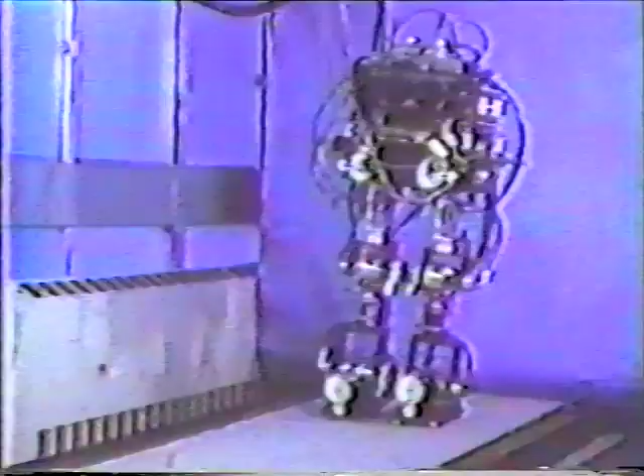Most efforts in the area of legged locomotion have been aimed at complex active mechanical systems using as many as 7 degrees of freedom and requiring very large control systems. Consequently, the motions of these machines have been quite awkward and clumsy, and certainly do not mimic human walking.

Human walking is essentially passive, requiring very little muscle interaction to achieve the motion of the walking. A robot based on this concept would require far less control and power, and would be inherently simpler and more efficient.

Passive dynamic walking is simple. It is a simple interaction between gravity and inertia that sustains a steady walking cycle on a downhill slope. No motors or actuation are necessary to achieve this motion. Take, for example, a slinky. As you give it a push down the stairs, the slinky coils and uncoils, and the interaction between the spring and gravity allows it to walk down the stairs.

Tad McGeer at Simon Fraser University used a similar concept to build some walkers that use passive dynamic motion in order to walk in a similar way. Part of our efforts in this project have been to recreate some of Tad McGeer's work in building mechanisms such as this one, and then to pursue some design ideas of our own, like this.

This video will show clips of these two walkers and some others walking on downhill slopes, shallow ones, about 1 to 5% grade. And then it will show some information on the details of our progression of ideas, as well as some information on some construction techniques and some additional important things that we learned creating these walkers.

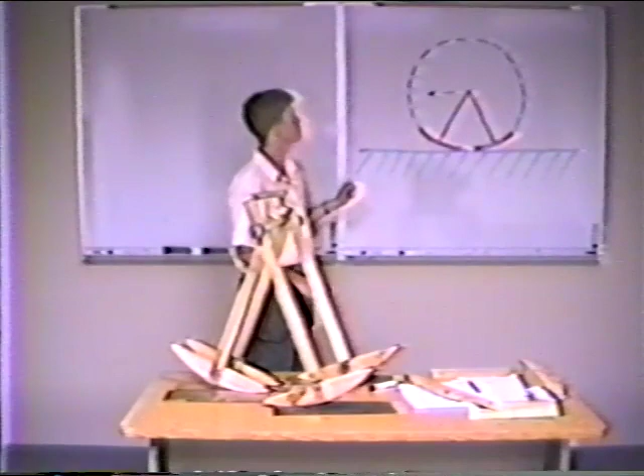So we decided, well, if we looked at this, supposing we make the radius tighter here, so that instead of having the two fit together like two wheels of equal radius, they would fit together with some displacement, so that you would actually conceivably get this to walk.

So we knew we wanted to have a smaller radius foot, but we really didn't know what radius to use or what size. So we decided that we should go and do some computer simulation to optimize what we would like to use in our next design.

This program here was written in ThinkC, and it allows you to vary the various geometrical parameters of the walker. Listed here are the mass of one of the legs, the length of the leg, the radius of curvature of the foot, the location of the center of mass, the inertia about the center of mass, and the slope that this walker will walk down.

Then below that are the initial conditions of the walker, the stance angle, and the initial velocities of the two legs independently. And at the bottom we can vary the integrator size, which tells us how precisely we can simulate it. Now, after pushing return, this will now simulate the walker.

At the bottom, you can see a graphic representation of the walker, and at the top are scrolling numbers showing the state of the walker after each step, after both legs are on the ground. That would be the stance angle and the velocities of the two legs. Using this simulation, we can vary the geometrical parameters of the walker and the initial conditions to figure out what combination of geometry and initial conditions will be most optimal in our walker design.

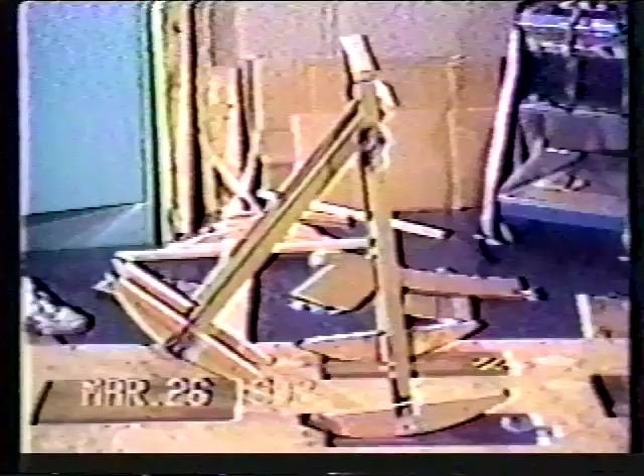Here you notice the outer legs are swinging by right now. It's leaning forward just a little bit. Strikes again. Swings through, it's leaning backward a little. Now in this part, the inner legs are now vertical, and the outer legs don't pass through until now, and it's leaning way far forward, and that's the reason that the outer feet scuff on the ground.

Okay, so it looked like the problem we were having was that there was an imbalance there somewhere. And we decided that we should go and make measurements of the properties of these legs independently. And so we did a simple pendulum swing test and measured the inertia of these legs independently. And found out just from measuring the frequency of the swing that the inner and the outer legs would swing at two different natural frequencies.

And intuitively, this would make sense that you couldn't get something to walk if they both wanted to walk at different rates. So we knew we had to change that. And after measuring them, we calculated where we had to add some additional mass, and found that we had to add about this much. We actually used bolts. Right now we have a solid piece.

But if we added a bit of mass here to the inner legs, we can compensate for the inertia that results from there being an asymmetry up here at the top. So we have a large crossbar on the outer legs that was adding to the inertia of the outer legs. So by adding this, we came up with much more reproducible results. And you'll see in the following clips that we were able to successfully get the walker to walk all the way down the plank that we constructed.

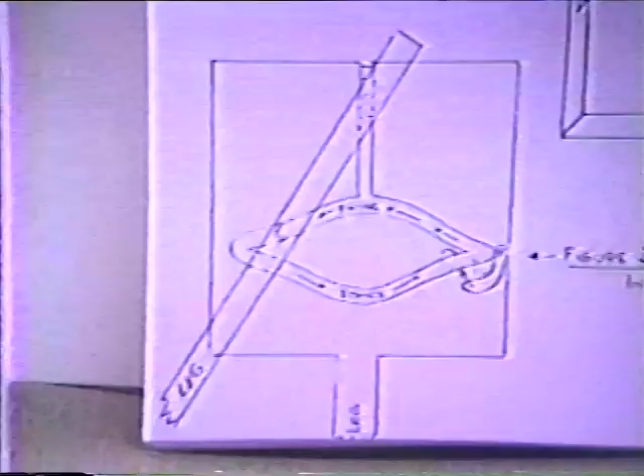And we thought, that might be an interesting way. What if we designed something with tracks routed out and followers that would provide this lift alternately on each leg? So we looked into designing this, and using this idea, we came up with another idea. This here is the idea that we came up with.

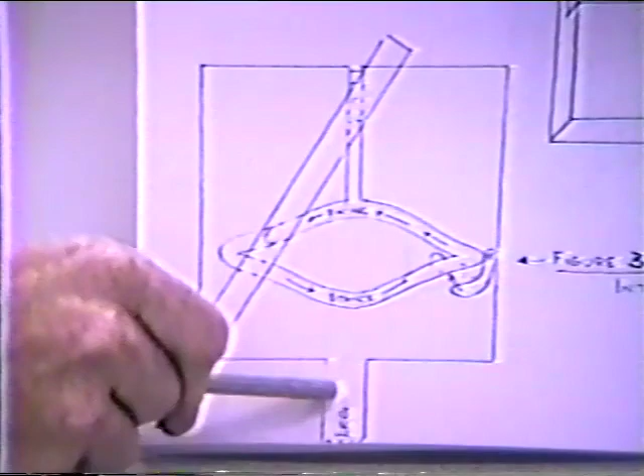And it took quite a bit of time to conceptualize this. This is not a very simple thing to think of at first. But there are two components here in this picture, on this diagram. One of them is this large block, which has one leg attached to it. And it has this path that has been routed out of it, very much like the Do Nothing machine has.

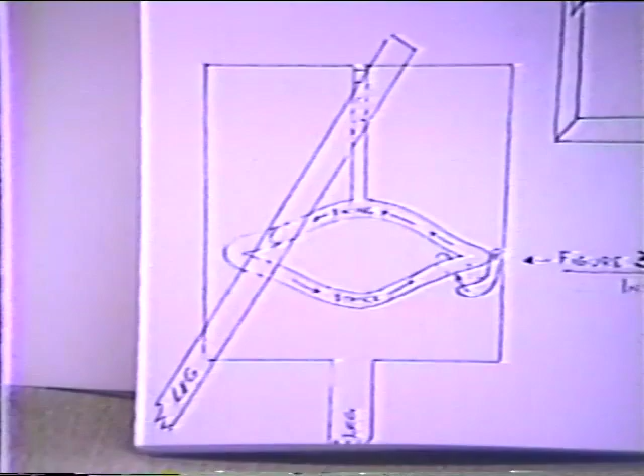The other component is this leg here, which has a pin follower and a slider attached to it. And as this leg swings, the pin follows one of these two tracks. When the pin follows the upper track here, it lifts this leg up, and that's why we term it the swing leg. When it comes to this point, it can swing down, and it becomes a stance leg because it pushes that leg down farther with respect to this leg.

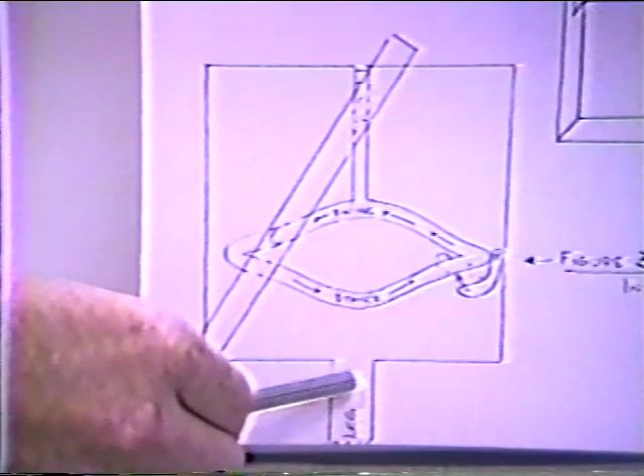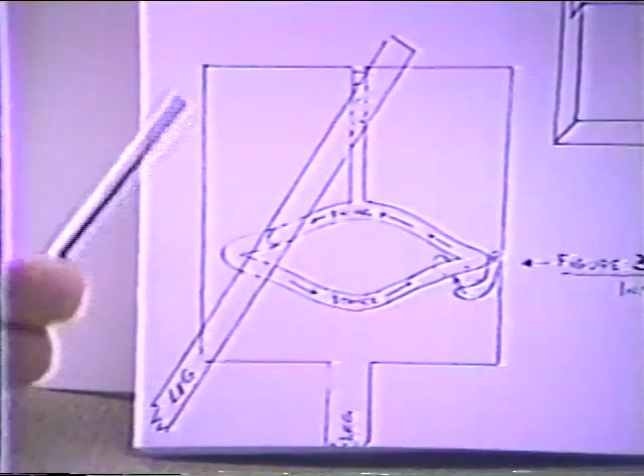So we figured if we were able to create some sort of a valve here and here, that we would be able to tell it which path to go on. And if we coordinate that with the steps of the walker, we could get it to lift its feet alternately. So we worked a bit more on this design, on the idea of having two valves here. And we just played around with some models.

And we came up with this idea, which is basically what we had before. This is just the routed track that the pin would follow. Imagine this as the pin. First, the leg would start here and would start swinging. And when it gets to this point, it starts to push down. So one leg is extending while allowing the other leg to swing.

And when it comes to this point, it hits the flip valve, which will be held with some sort of spring in here somewhere, maybe a torsional spring. And it would push it up and out of the way. When it gets to here, the torsional spring will flip the valve back. And thus, when it comes back to swing with the other leg, this leg will now be lifted, and this will become the swing leg. And it will follow the upper track.

And then when it gets to here, we'd have another flip valve in this location, so that we could tell it effectively through the design to follow only one loop here on the tracks. It would not go back through the wrong track. So taking this idea, this seemed to be pretty good. The one problem remaining was that it seemed to be a complication to have two valves here, because both of them would have to be consistent, and it seemed like a mechanical difficulty.

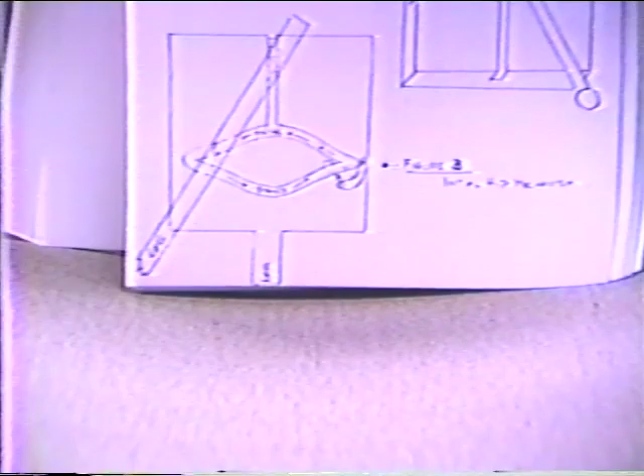And we thought, wouldn't it be nice if we would be able to design a single centerpiece that would tilt and accomplish the same task of defining the path that the pin follower should go along. So what we did is we went over to our computer-aided design program and played around with this idea. We knew the track that we wanted it to follow. And we came up with the idea of having the central cam.

Now, this thing looks a little bit silly, and it struck us when we made this that it looks kind of like a face. So when we mention this term called smile in some of our programs, that's referring to this whole thing, and it looks like a smile. But the idea here is that we would have our pin follower grab something like this.

We would have our pin follower slotted into here, and this would swing down, and it would follow what we call the wobbler. This centerpiece is called the wobbler. The rest of it is called the track. It would swing through here, and when it gets to this point, the force will just push the wobbler to define the next segment of the track, and the pin would swing all the way up to here. And it would swing as far as was necessary, depending on the slope.

This is all left free, so at some point in the swing, it will swing up and stop somewhere and start to fall back. Before it makes it all the way back, there'll be a torsional spring which will flip this wobbler back this way. So that as it's coming back, it now follows the upper path, providing the lift for this leg. And as it comes across, it will tilt the wobbler back and follow through.

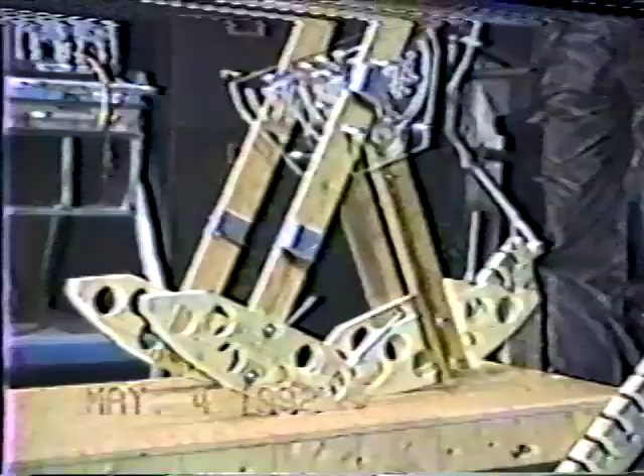Now, what we'll do here is we'll show you a quick clip of what this looks like as it's walking, and this will give you a better idea for just how easy it is for this thing to move. So, it's starting slowly. No, it scuffed there. Turns out that balancing the inertia for this walker is even more important than on the third walker, since we have all this complication in the middle.

So we have these added masses here that are being carefully positioned after a day's worth of work. And we put them on, and we've run tests, and it runs very well down the ramp. And now we'll leave you with some clips of some ramp walking, and then we'll show you some outdoor walking. We've achieved success in this way. The right one hits first. Yeah, I noticed that.

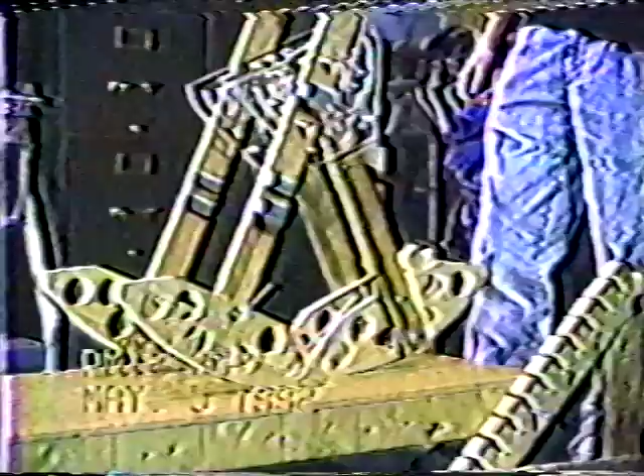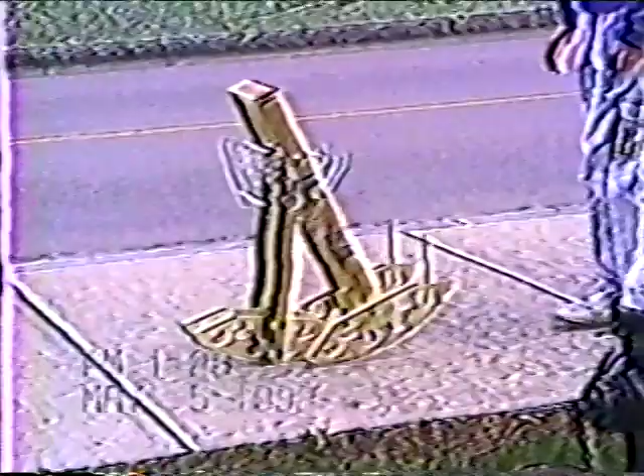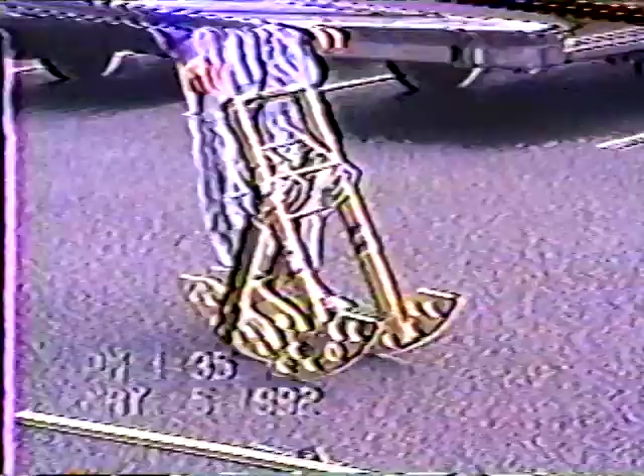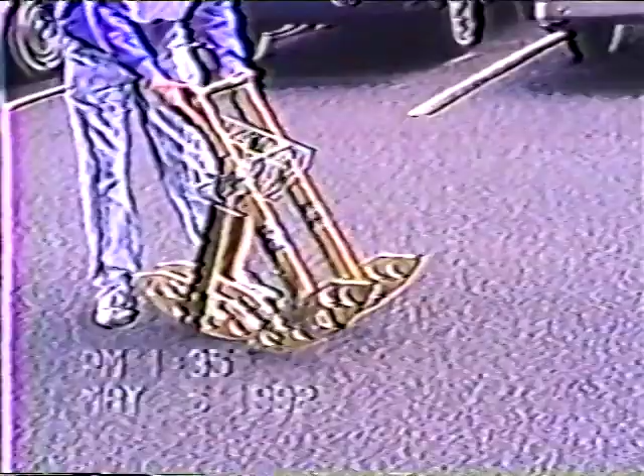It scrapes now and then, it usually recovers. Seems to want to go near this car. Yeah, the slope's getting pretty rough down here. Just pushing it to the limits. Is he gonna make it?

That's how you get away without paying traffic. Parking tickets.

Here's the engineering quad. There's Upson, and there's Glen. This is that long thing. It heads all the way down to the sundial. We're gonna try it. Pretty nice slope, something around 3%. Though it increases a bit down the ways.

In front of the biotech building now. Line is to our right. Little rocks.

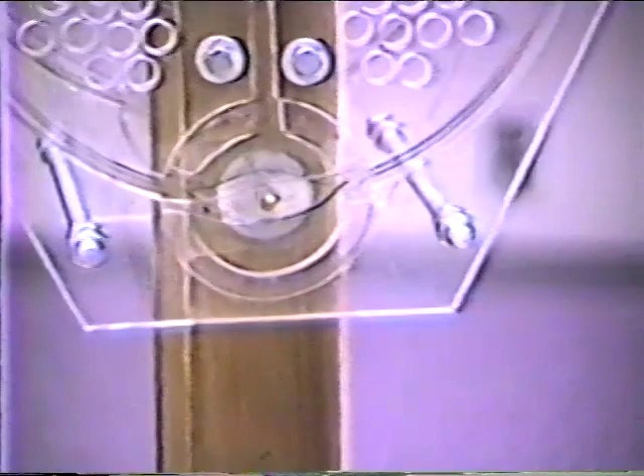For the inner legs, to do a similar pendulum test, you remove the wobbler in here, and you replace this wobbler shaft with just a long 1/4 inch shaft, and you can do the exact same pendulum test with the inner legs as you did with the outer legs. So you can compare the frequencies, compare the periods of motion, and basically make these two legs dynamically similar, even though they look a lot different.

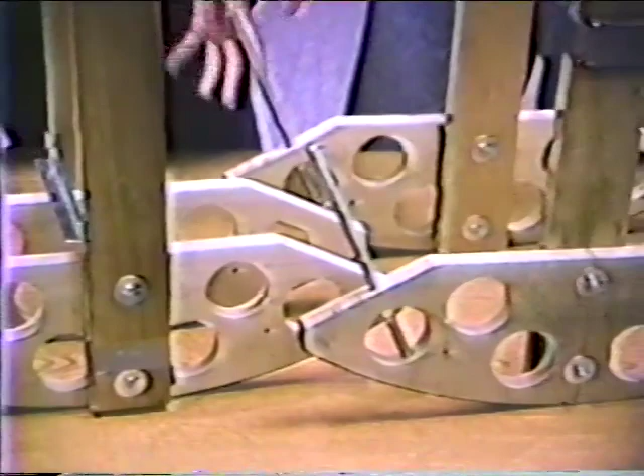You'll also notice these two so-called antennas on the back of the feet, which were added also to balance the inertia, slight displaced mass, which helps. The actual explanation for these is somewhat shady, other than the fact that we sort of looked at it and it seemed to be something wrong, so we just tried adding things until it worked.

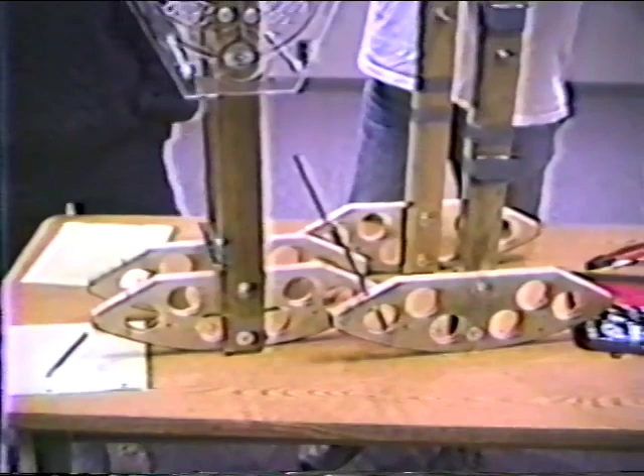This walker in general is a little bit more sensitive than walker number 3 was, just because there's a lot of components here, and there's a lot of little adjustable things and things you can balance. So to get this to work, it is a lot of little tinkering and playing. Even now, there's still some stuff that could be done to get this to walk better, just by screwing things in and out and adjusting them.

So actually, that's a good time to talk about things that we can adjust. If we look at the inner legs, we have the two plexiglass smile tracks, which we call smile tracks. They're connected by aluminum shafts. These shafts actually used to be steel, but as part of that weight reduction, we had to switch to aluminum shafts. And we machined the shafts ourselves.

It used to be a solid, smooth shaft, and we put threads on the end. So each one of these shafts can be loosened, and the nuts can be slid along to effectively pull these tracks in or out. And since you have 4 of these, you have a lot of flexibility in how you can adjust these. And there's 2 purposes really to leaving all that flexibility in here. One of them is to keep these tracks perfectly parallel, or at least pretty close to parallel. The other idea is to keep this wobbler snugly fit.

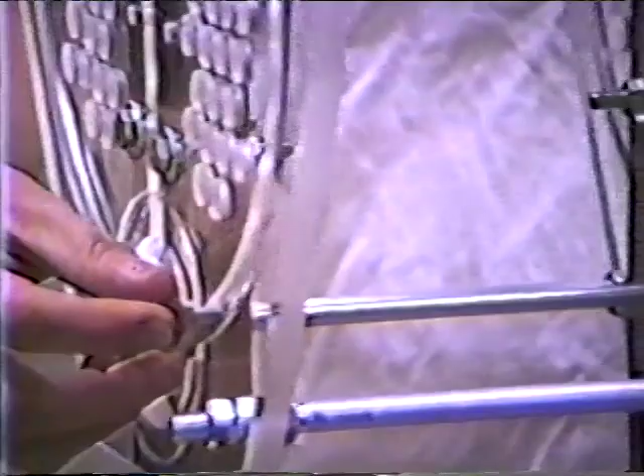In other words, the length of this wobbler connecting between the two plates is not adjustable. It's a fixed shaft in there. So what we did is made the distance between the 2 plates adjustable, so that we could push them in or out, so that the wobbler fits in there nice and snugly and doesn't have any extra movement in or out. In other words, it can't wobble in or out. Only wobble sideways.

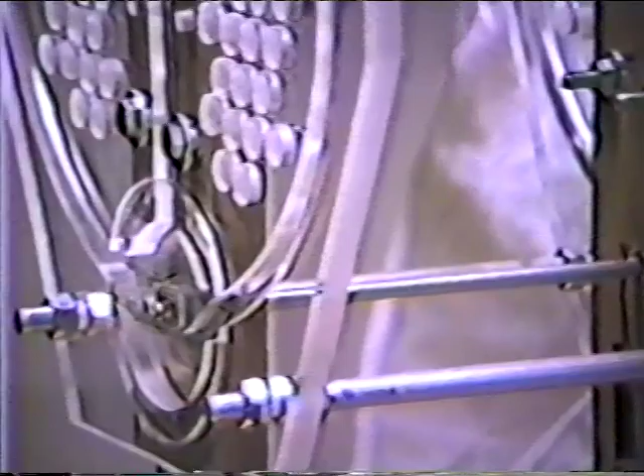What's the other adjustment? Oh, okay. The pins on the outer legs. These pins, first of all, talk about how we made these pins. These pins also originally used to be aluminum, and we went to steel, actually adding weight, but it wasn't much weight. We initially tried to make these out of steel. We tried starting with a smooth steel shaft and machining threads onto the shaft, so we had this threaded adjustability. And that was difficult to do, mainly because steel is pretty hard to machine.

Trying to cut steel threads using a steel bit. Steel's no fun to work with. We recommend not using it if you can avoid it. Steel's really hard. So after concluding steel was really a pain to work with, we switched to aluminum. And we took a bare aluminum shaft, tried to put threads on it, similar to this. And that was okay. It wasn't too hard to put the threads on, but unfortunately these pins take a lot

of abuse. They're banging around inside the track, and there's a pretty strong moment about here. And in order to keep them from wiggling around too much, we have to clamp these steel nuts on pretty hard. When you take a steel nut and you clamp it very tightly onto an aluminum shaft, that doesn't work either. And pretty soon we were just stripping the threads off the aluminum. So this time we went back to steel.

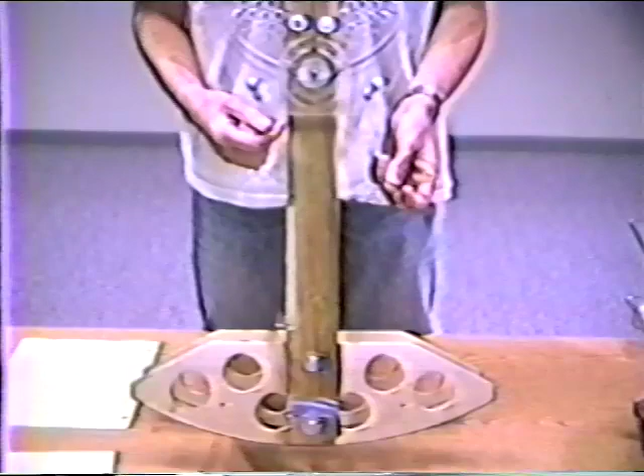Oh, and the other problem: they can also move in and out because the holes are pretty big. So there's a problem of adjusting the length exactly correctly. And if the feet are misaligned, it definitely causes problems, because you can imagine if we take this foot and misalign it, we're pulling the center of it somewhere over here. Effectively we're totally screwing up the dynamics that we spent all that time in computer simulation studying. We're pulling the center of mass away from where it used to be, and things get messed up.

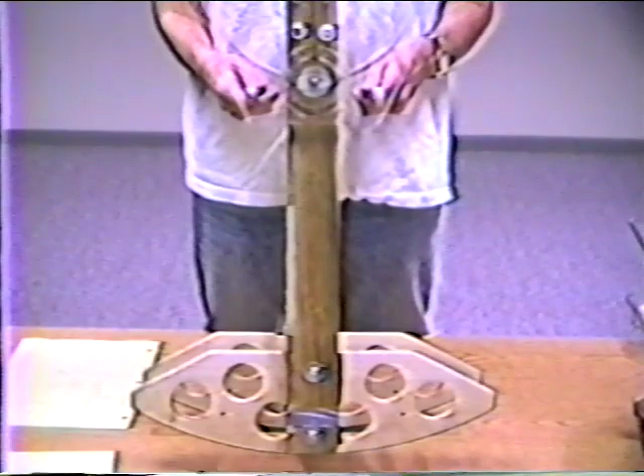So the walker starts to turn instead of walking straight. Things like, if one foot hits earlier than the other, things start to turn. Actually, that's another thing that could be cool to work on. You can see it in some of our outdoor video. Sometimes when this thing hits, one foot hits a little earlier than the other because they're misaligned, which causes it to turn, and it does weird things.

That could be a possibility for adding some kind of steering control to this thing, just purposely misaligning the feet so that it spins because one foot hits a little earlier than the other. Although it would be a pretty complicated thing to do. So I don't know, one of our mistakes could end up being a really cool idea. What else? Foot clearance. Let me reassemble this thing.

Weeble walks pretty well outside. I think our record is 47 steps. 47, great. I think it should be on this tape. Maybe we'll put it on. We haven't decided yet. But the record, you pan down. Yeah. Down. No, okay. There we go.

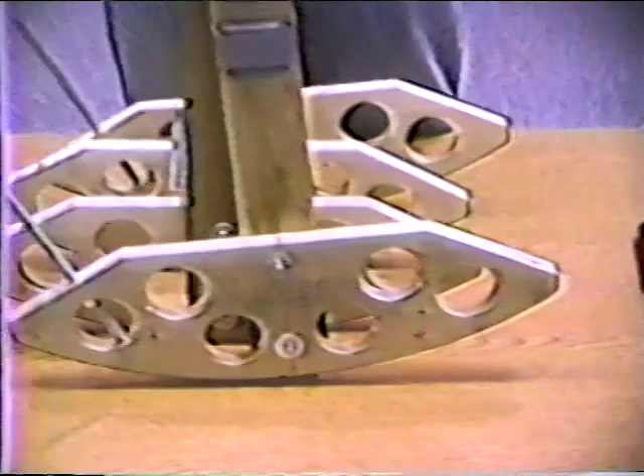The wobbler gives us pretty nice clearance; we designed it for a half-inch clearance. You can see while the two legs are passing exactly right by each other, we have almost exactly half-inch clearance. But as this leg swings through, that clearance drops off. And then it starts to increase again as it passes by the wobbler. Why did this happen? Well, it's because we sort of screwed up. Well, we didn't exactly screw up. We just didn't think of it.

We designed for a half-inch clearance through here, and then the half-inch clearance slowly dies off at some point until it gets back to just the regular motion. Well, our die-off period is a little too short. It comes down too quickly as it passes from here to here, and you notice how critical it gets right there. That's not a lot of clearance. So the wobbler could be redesigned so that it still had a half-inch clearance right at the center. That seems to be fine. But make it maybe a little wider throughout the entire swing to give it half-inch or maybe a little more clearance through here, and probably prevent a lot of the problems that we encountered on the videotape.

On our specially designed, perfect slope in the lab, it seems to work pretty well. But once you take it outside and get some varying slopes and discontinuities in the pavement and stuff, it starts to scuff because the clearance isn't quite as good. Ideally, when we're at the vertical, we get this half-inch clearance, and then it starts to drop off, but then it comes back up again as it starts to swing through. What would be perfectly ideal is if you designed the wobbler so that the half-inch clearance was almost continuous throughout the whole swing.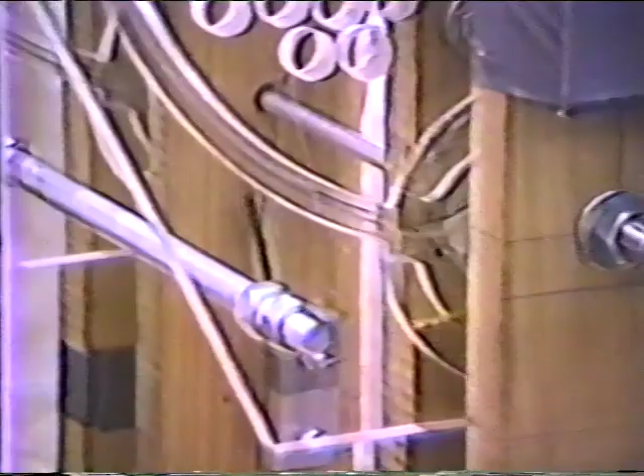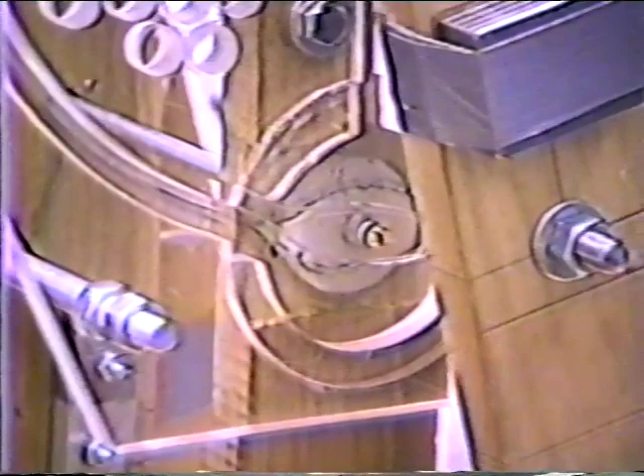So, should we take a look at the wobbler? Yeah. What has to be changed here to do this? It's kind of hard to see. We're just thinking about thickening that part. So, the wobbler gives you a half-inch clearance, but as you keep going, that half-inch clearance drops off. And what we envision, a redesign of the wobbler would make it a little wider, so that maybe this portion over here is a little bit wider than it is now and lifted right towards the ends.

That's one of the biggest problems. Well, the two biggest problems with this walker are that the wobbler needs to be redesigned and that the feet are pretty hard to adjust, making all this mass balancing kind of tricky. For that reason we had to stick those antennae on the back, just to get it to work. Is that all we have?

I don't know how to prevent this other than making it out of a stronger material. This thing is a little flimsy because you made it out of wood. Yeah, wood is cheap, but it has this problem: it warps and it bends all over the place. So it's not as stable as we'd like it to be. So it can wiggle like this.

We added this metal crossbar across it, trying to prevent that for the inner legs, and it does a pretty good job there. There's really nothing you can do about the outer legs, because they have to be able to swing through freely, so the only place you can connect them is way up top. Just top. So this crossbar up here has to support this whole entire line. And wood just isn't all that great for doing that.